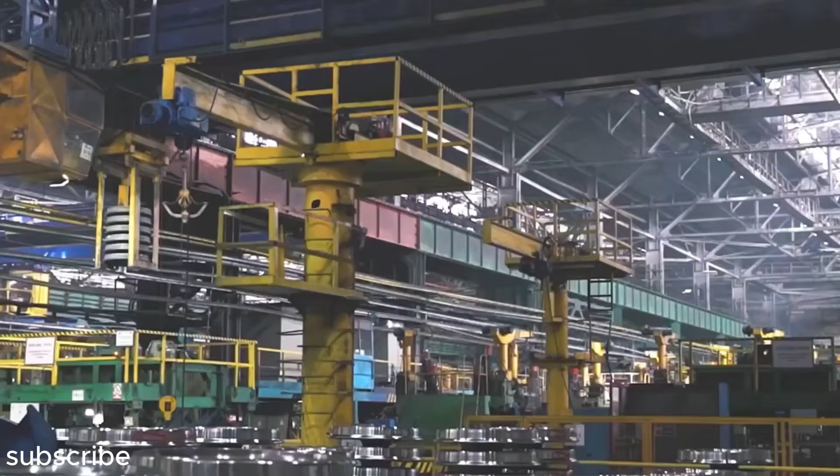Some machines carry the weight of their creation long after the men who built them are gone. They run through history, trailing the ambitions and the obsessions of those who designed them, moving through time with a kind of mechanical indifference to the human cost of their existence.

But there are rarer machines so entangled with the fate of their creators that the two stories become impossible to separate. Machines where the line between triumph and tragedy runs directly through the same moment, the same decision, the same single point where genius and catastrophe met and became permanently inseparable.

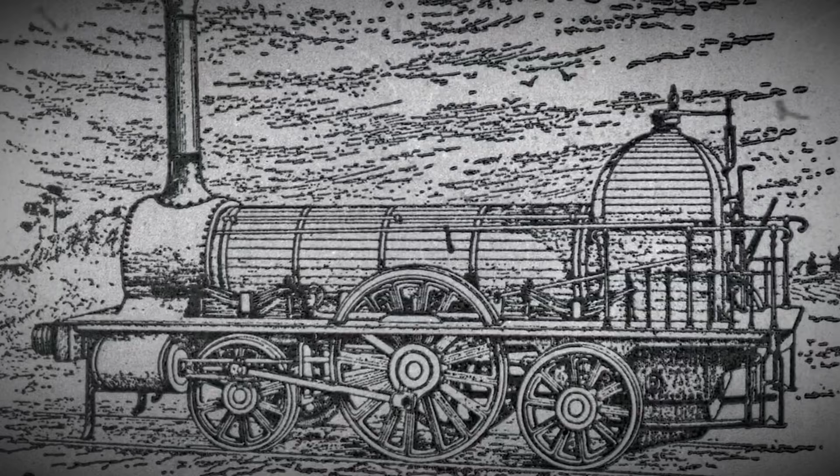This is the story of one of those machines, a locomotive that its inventor gave everything to build, that repaid that devotion in the worst possible way, and that afterward vanished so completely from history that for decades most people doubted it had ever existed at all.

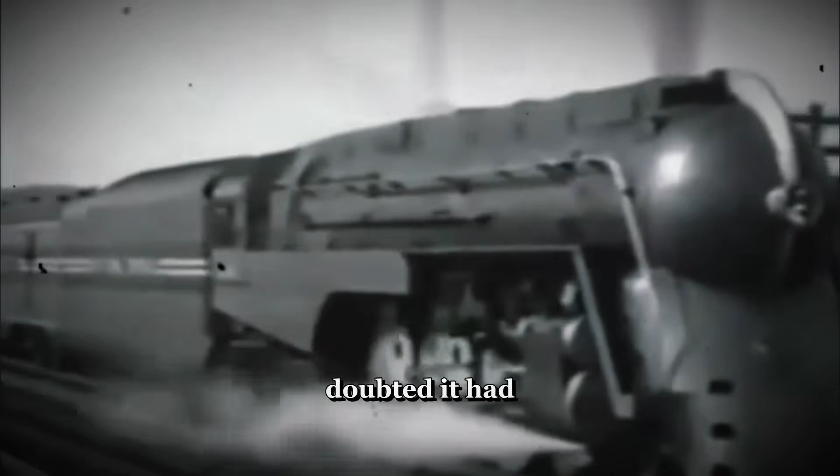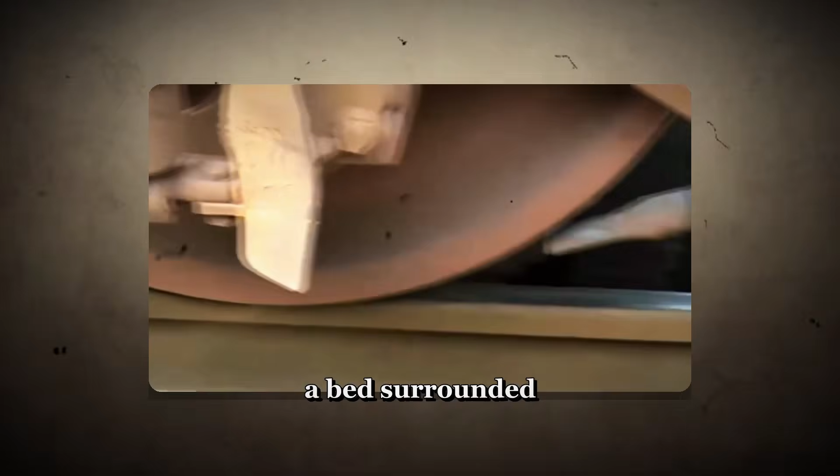The story begins not in a workshop or a railway yard, but in a hospital ward in the industrial city of Manchester in the winter of 1901. A man named Arthur Coleridge Drummond lay in a bed surrounded by the kind of institutional stillness that settles over places where people go to recover from things that can't be recovered from.

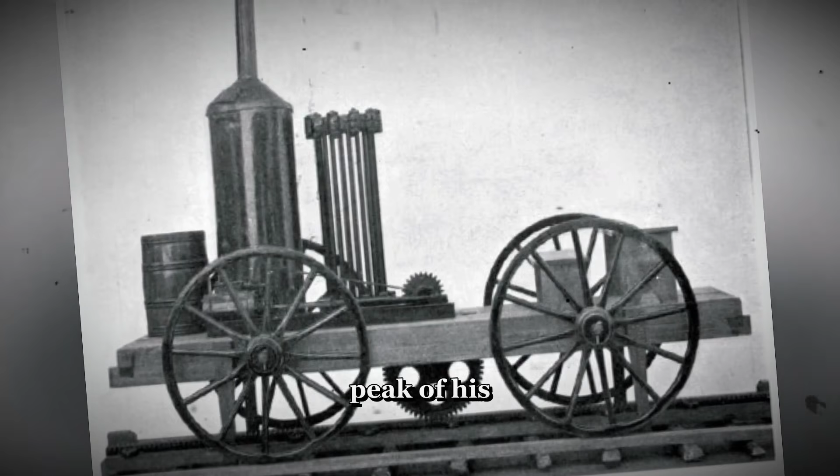He was 43 years old, which, in the context of Victorian and Edwardian engineering, meant he was at the absolute peak of his professional life. The best work, by conventional measures, should have been ahead of him. Instead, he was lying in a hospital bed with injuries that would keep him there for 8 months.

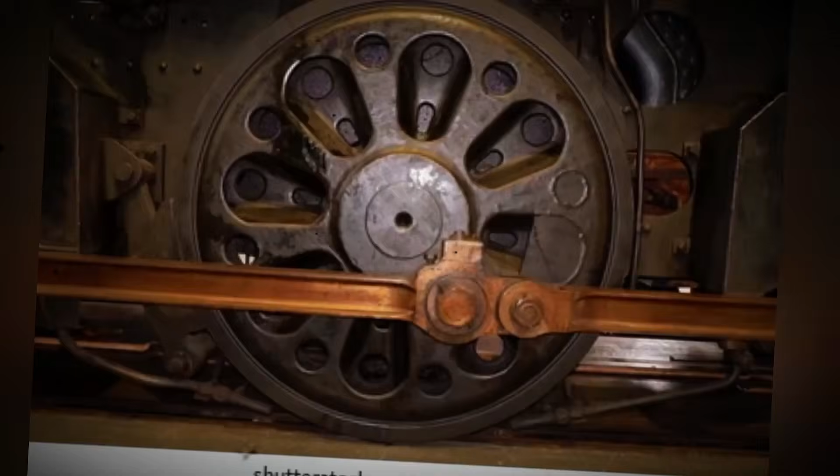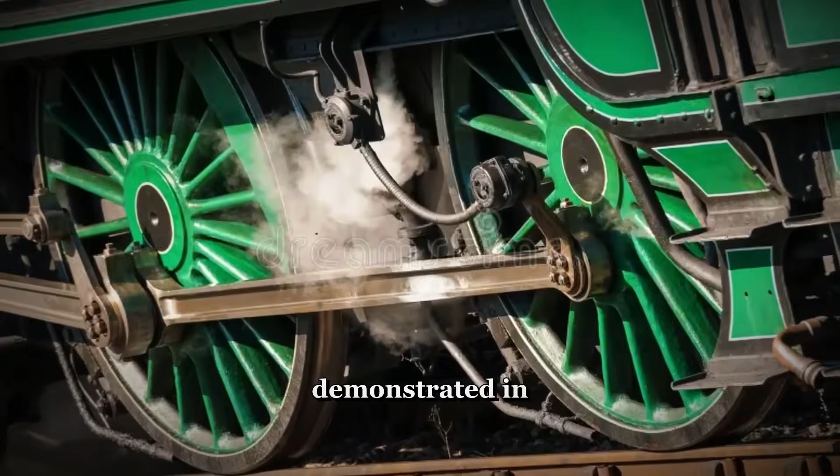Injuries sustained not in some industrial accident or railway disaster, but in the testing of a machine that he himself had designed, that he had spent 11 years of his life building, and that had, on its first full-speed trial, demonstrated in the most brutal possible way that it was not yet ready for the world.

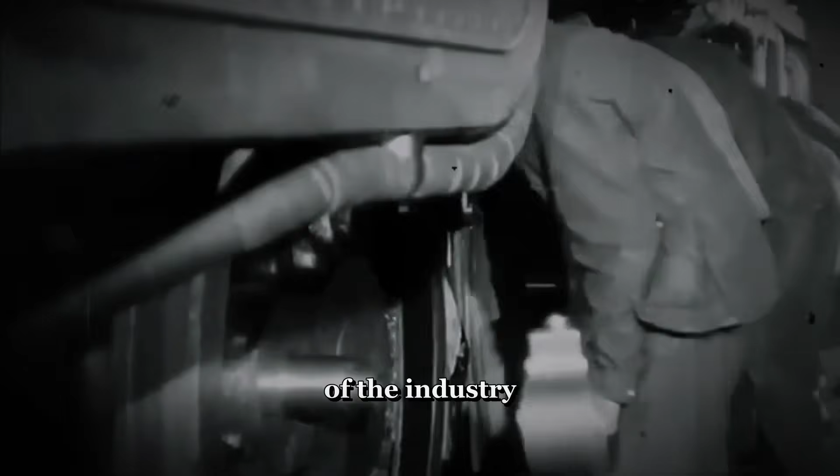Drummond was not a well-known figure in the railway world. He had spent his career at the margins of the industry, working as a consultant rather than as the chief engineer of any major company, taking contracts where he could find them, surviving on the income generated by smaller projects while devoting his real attention and his own financial resources to the machine that consumed him.

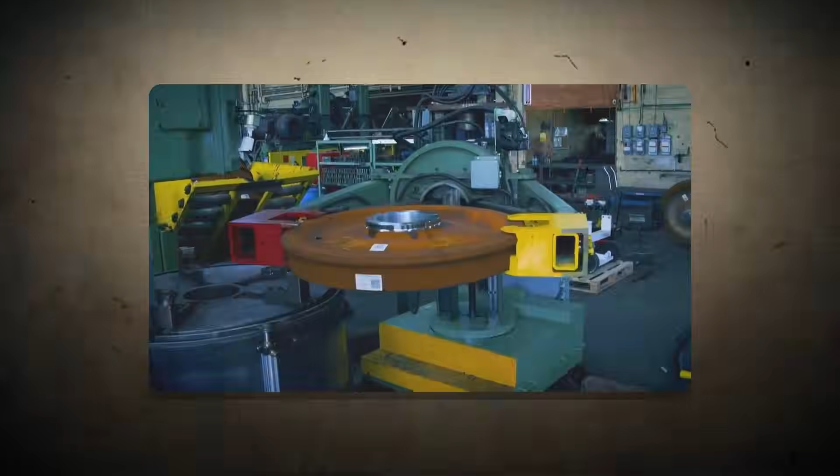That machine was a locomotive that he called, with the kind of quiet confidence that sometimes borders on arrogance, the perfect engine. The name was not accidental. Drummond genuinely believed that the history of locomotive design had been a long progression of approximations, each generation of engineers getting closer to an ideal that nobody had yet achieved.

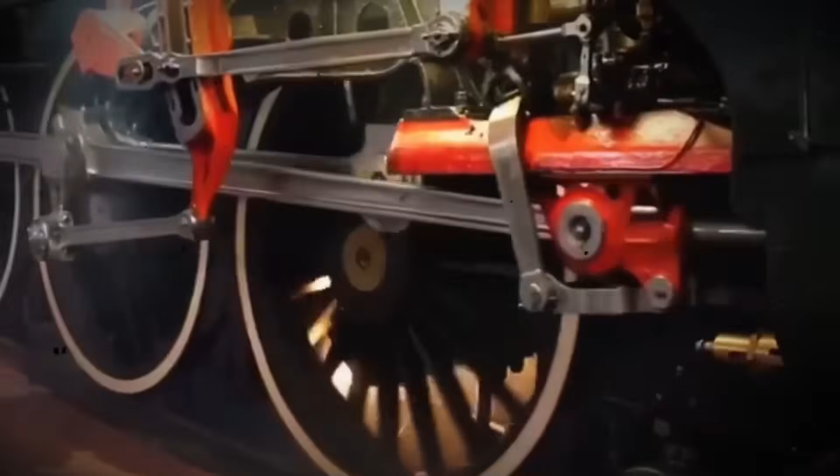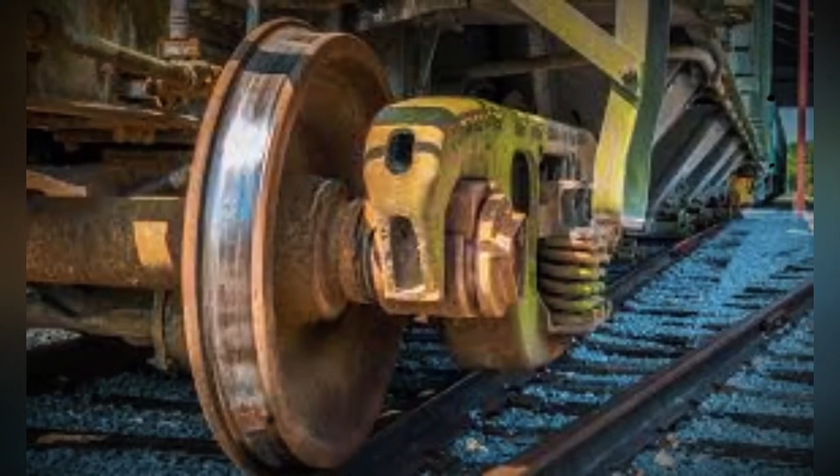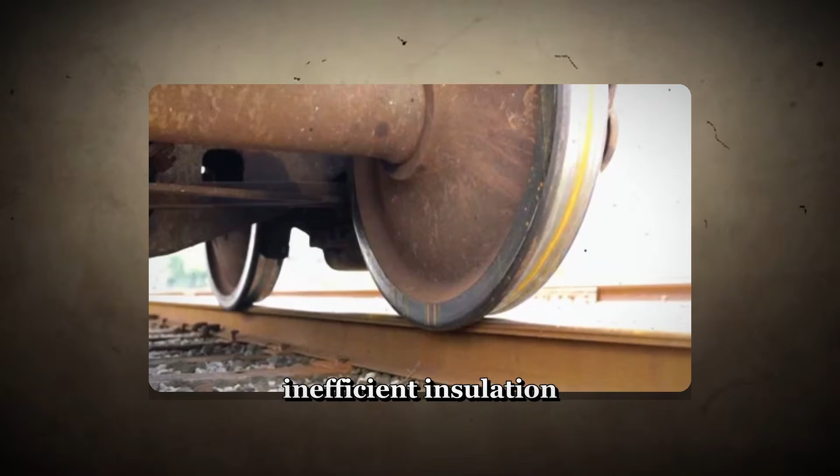The ideal he had in mind was specific and technical. He wanted a locomotive that wasted nothing, a machine where every unit of heat generated by the combustion of fuel was converted through a sequence of mechanical processes that he had spent years calculating and refining into tractive effort at the wheel. No steam exhausted before its full energy was extracted. No heat lost to the atmosphere through leakage or inefficient insulation. No mechanical energy absorbed by friction in systems that weren't contributing directly to forward motion.

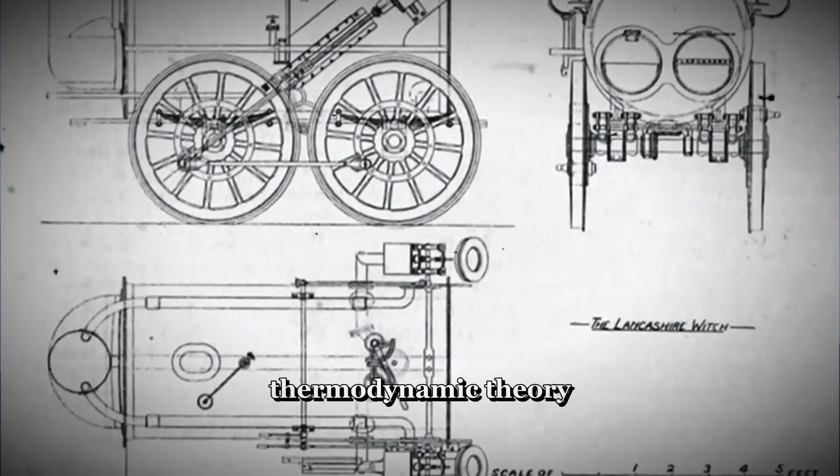This was not an impossible dream in theoretical terms. Thermodynamically, the ideal engine Drummond envisioned was coherent. The problem was engineering it into a machine that could actually run on railways. The gap between thermodynamic theory and mechanical reality was precisely the gap that had defeated every previous attempt to build a truly efficient steam locomotive.

Drummond was convinced that his predecessors had failed not because the goal was unachievable, but because they hadn't been willing to depart radically enough from conventional design approaches. He was willing to depart radically. He was, if anything, too willing.

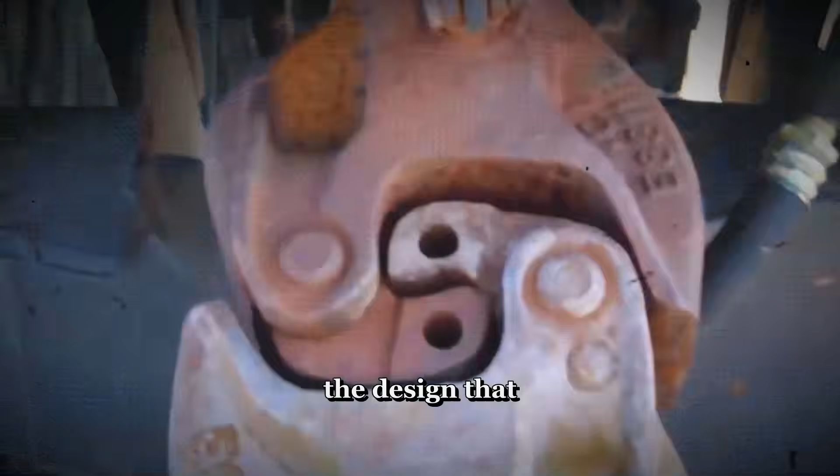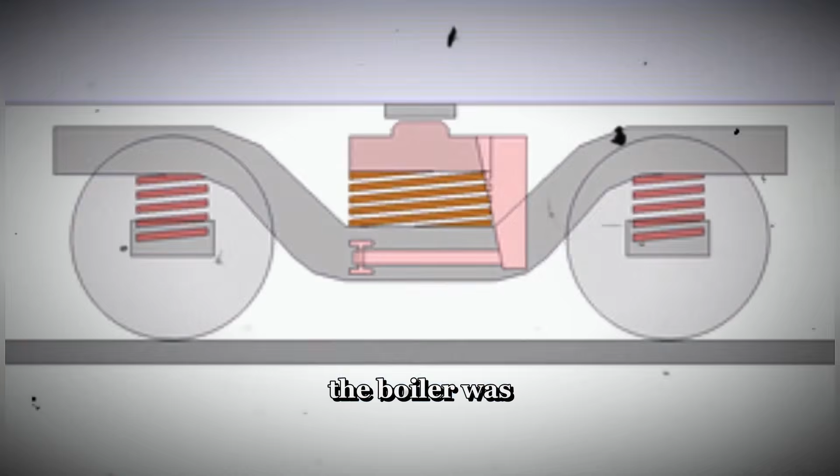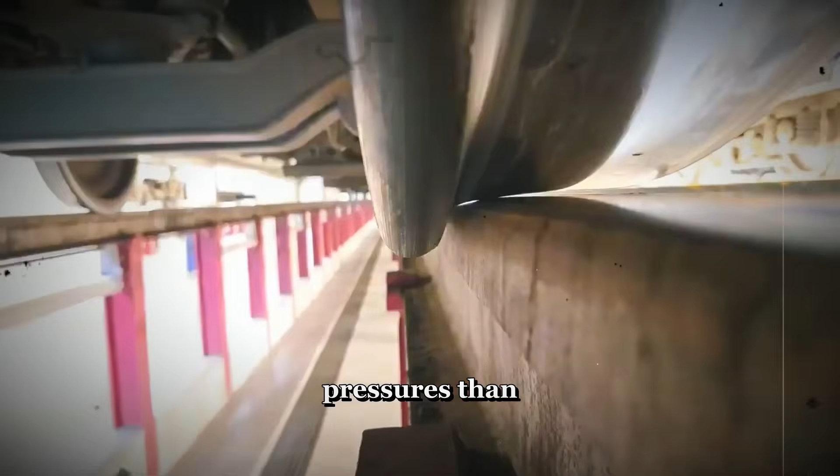The design that Drummond developed over 11 years of calculations, drawings, revisions, and more revisions was unlike anything that had appeared in British locomotive history. The boiler was a compound water tube design, borrowing principles from marine engineering that had never been applied to a railway locomotive. Instead of the conventional arrangement of fire tubes passing through water, Drummond's boiler used water tubes passing through the hot gas stream, a configuration that allowed much higher operating pressures than conventional designs could safely achieve.

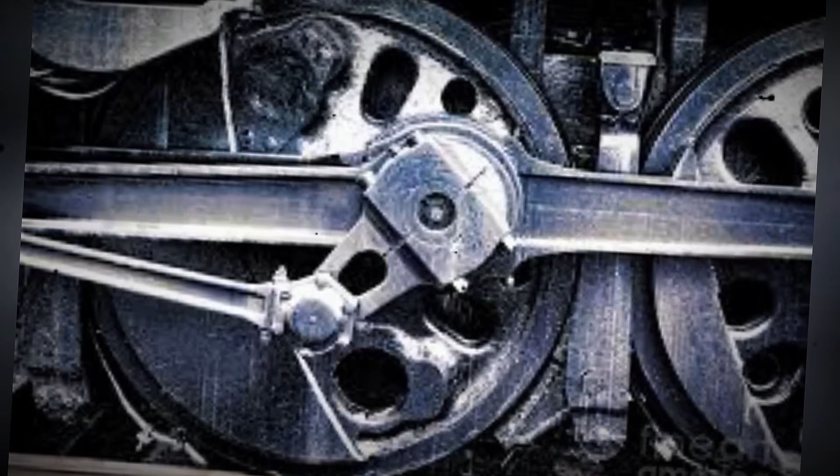The working pressure was specified at 400 pounds per square inch, nearly double the standard for express passenger engines of the era. The steam circuit was correspondingly complex.

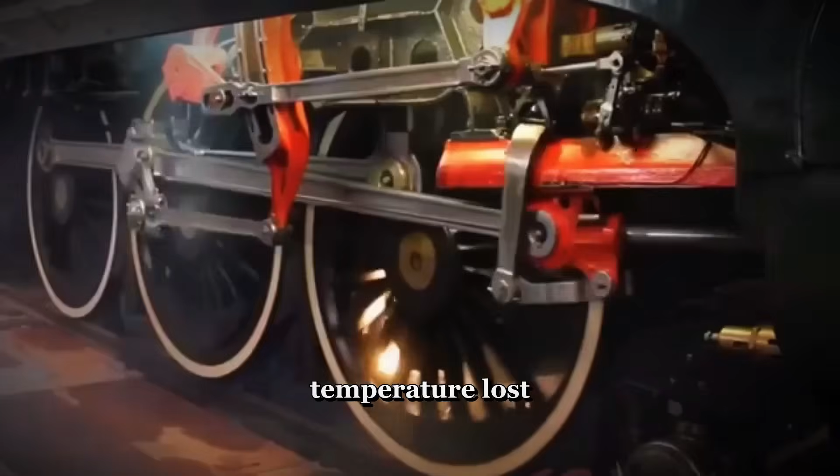Steam generated in the high-pressure boiler passed first through a high-pressure cylinder where it did the majority of its work. It was then collected, reheated to restore the temperature lost during expansion, and passed through an intermediate cylinder. From there it was collected again, reheated once more, and passed through a large low-pressure cylinder where the remaining energy was extracted before the steam was finally condensed and returned as water to the boiler.

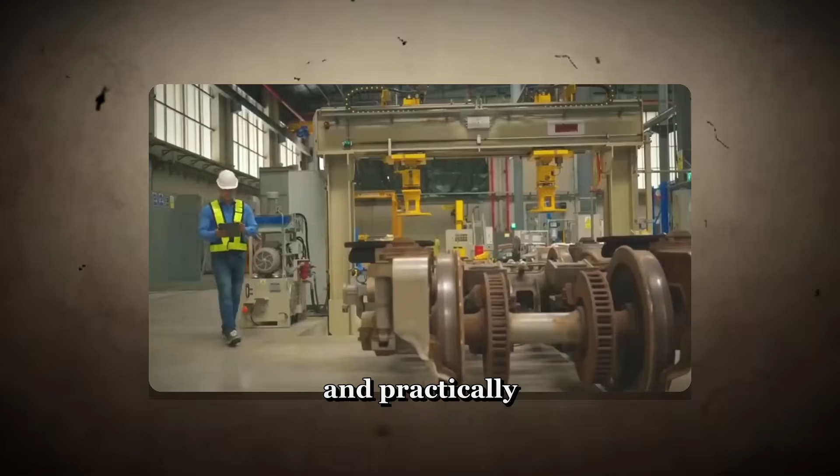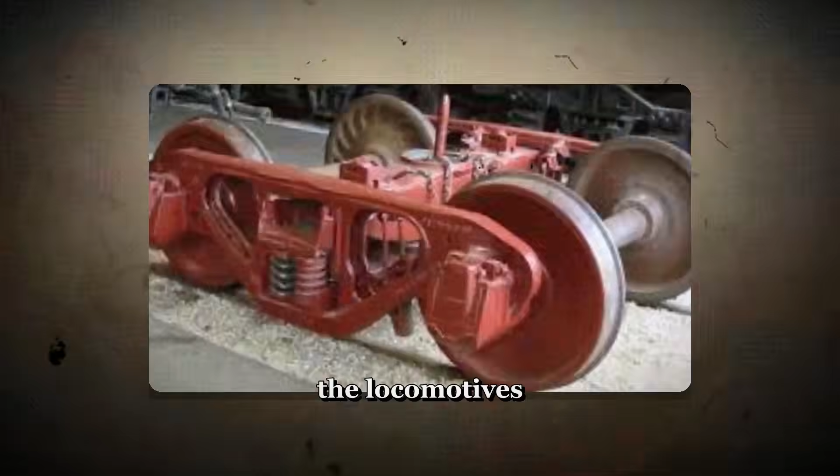This triple expansion arrangement with intermediate reheating was theoretically elegant and practically nightmarish. The number of pipes, valves, heat exchangers, and control mechanisms required to make it function was extraordinary. The locomotive's internal systems were more complex than anything previously attempted in railway engineering anywhere in the world.

Drummond financed the construction partly through his own savings, partly through loans, and partly through contributions from a small group of investors who believed in his vision with an intensity that, in retrospect, looks more like faith than engineering judgment. The construction took place at a small workshop in Sheffield, where a workforce of 7 skilled craftsmen worked under Drummond's direct supervision for 3 years.

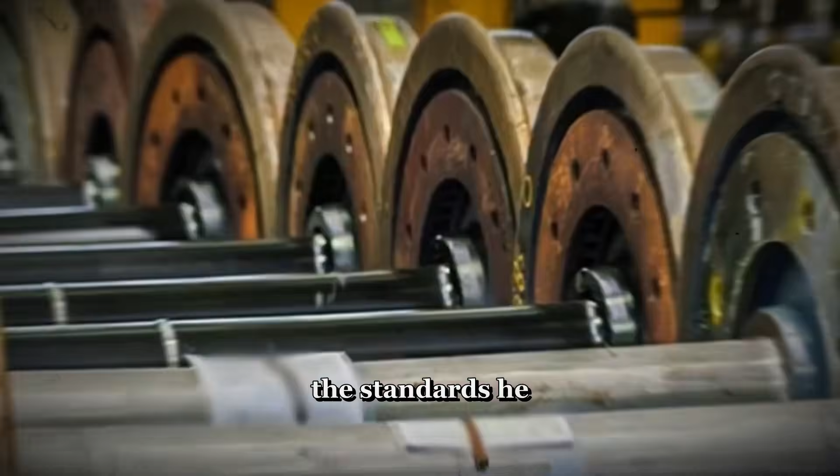The standards he demanded were extraordinary. Components were machined to tolerances that the workshop's equipment could barely achieve. Assembly procedures were documented with a precision that was decades ahead of common practice.

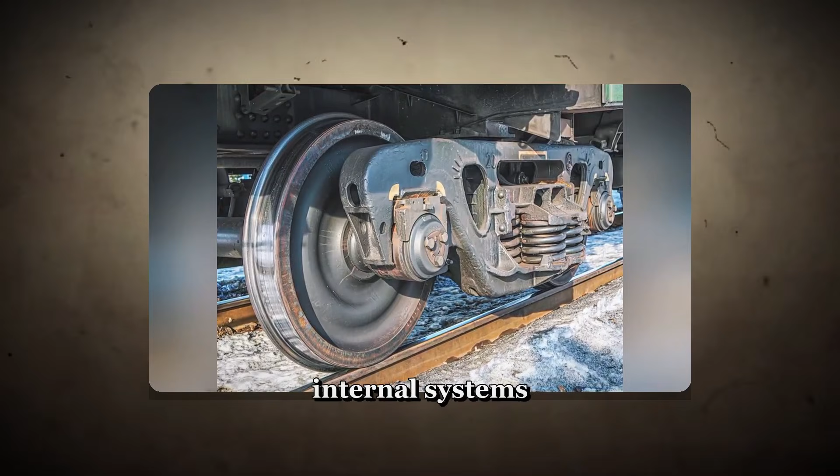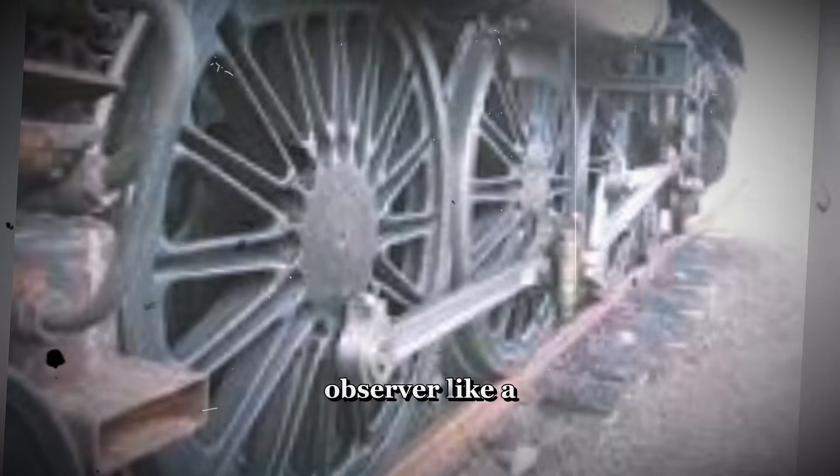By the autumn of 1900, the locomotive was complete. It sat in the Sheffield workshop gleaming with fresh paint and polish, its complex internal systems invisible behind a conventional exterior that gave no hint of the mechanical revolution Drummond believed it represented. It looked, to the casual observer, like a reasonably conventional express locomotive of its era. Only the density of pipework visible at certain angles suggested something unusual was happening inside its carefully crafted skin.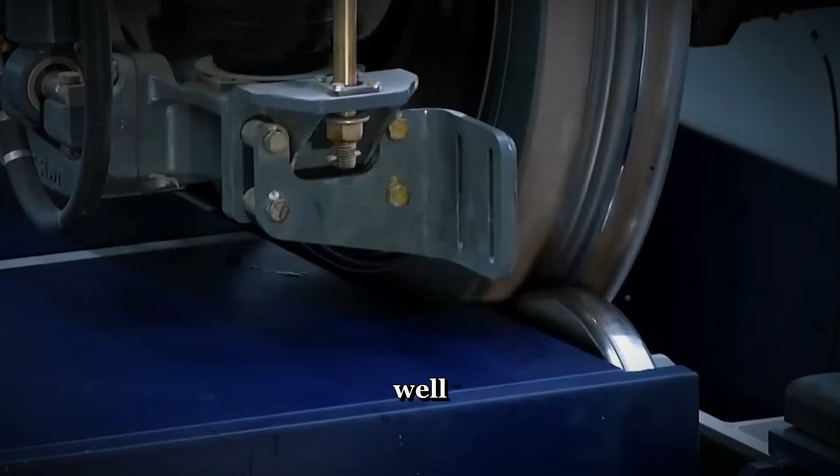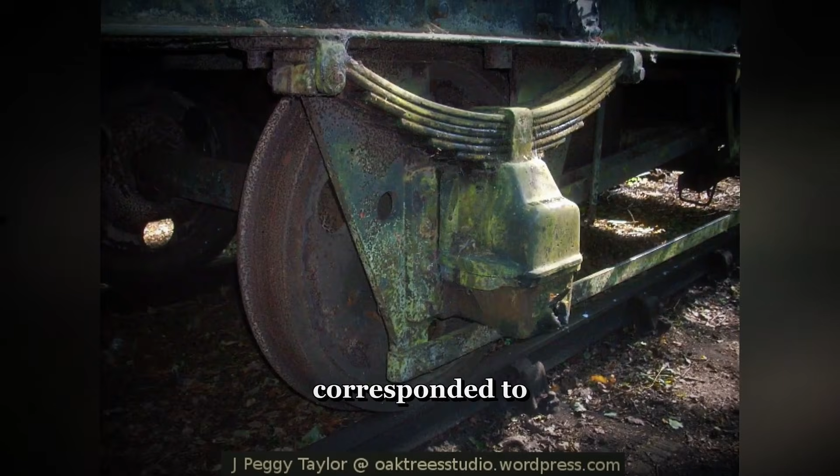The initial tests were conducted at low speed on a short stretch of private track near the workshop. These tests went well, encouragingly well. The locomotive moved under its own power. The complex steam circuit functioned as designed. The pressures and temperatures at various points in the system corresponded to Drummond's theoretical predictions with a closeness that made him dizzy with satisfaction. The years of calculation, the months of construction, the financial strain, and the professional isolation all seemed, in those initial moments of successful operation, to have been entirely justified.

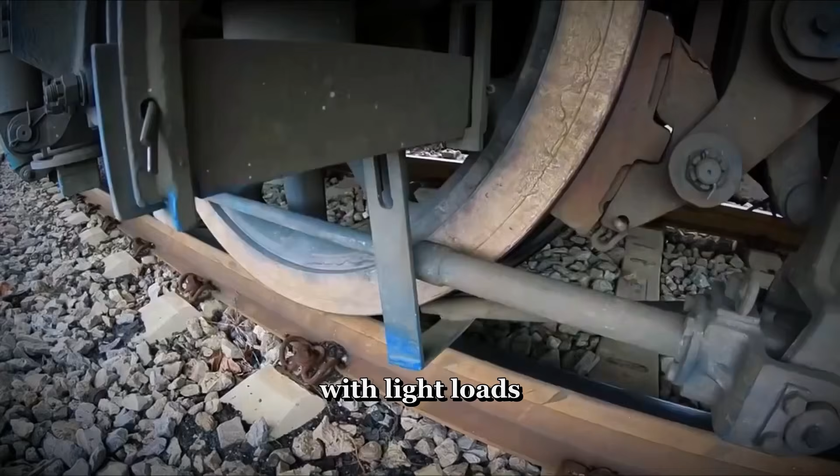The problem was that low-speed tests on private track could not reveal the locomotive's behavior under the conditions for which it had been designed. The perfect engine, as Drummond's complex reheating system made clear, needed to be running hard to demonstrate its advantages. At low speeds, with light loads and moderate steam demands, the sophisticated triple expansion circuit was largely irrelevant. Its benefits would only appear when the locomotive was operating at full output, when the pressure differences between the stages were large and the heat recovery systems were working at full capacity.

To properly evaluate the design, a full-speed trial was essential. Drummond arranged this trial with characteristic thoroughness. He secured permission to use a section of the Great Central Railway for a high-speed run. He selected a stretch of relatively flat track where the locomotive could be brought up to maximum speed without the complication of gradients. He assembled a party of observers, including 2 engineers whose opinions he respected and whose testimony he intended to use when presenting the perfect engine to railway company executives who might be interested in licensing the design. He prepared measuring instruments to record pressures, temperatures, and fuel consumption throughout the run.

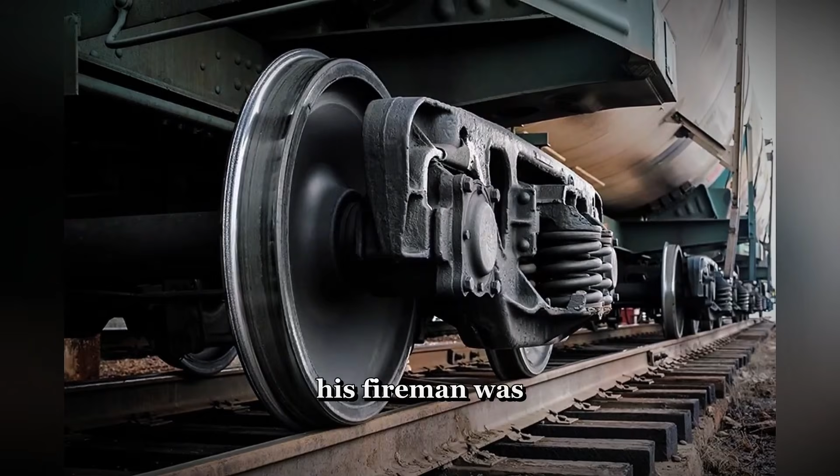On the morning of the trial, the atmosphere was tense with anticipation. Drummond drove the locomotive himself, something unusual but not unprecedented for an inventor demonstrating his creation. His fireman was a young man named George Parkin, chosen for his skill and calmness under pressure. The observers rode in a special coach attached behind the locomotive. Everything was in order. Everything was as prepared as it possibly could be.

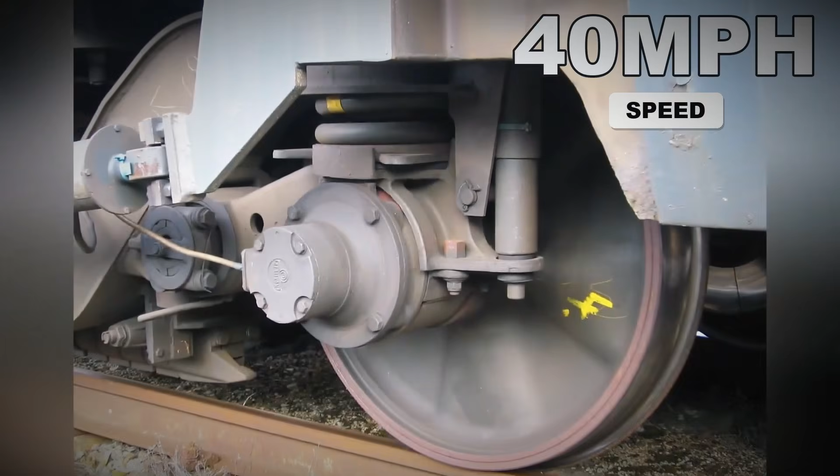The run began well. The locomotive accelerated smoothly, the complex steam circuit working exactly as Drummond had designed it. Speed built gradually, passing 40 miles per hour, then 50, then 60. The observers in the coach behind were recording data, noting with growing interest that the fuel consumption figures being calculated were genuinely impressive, significantly better than contemporary express locomotives of equivalent power output. Drummond, on the footplate, was experiencing the extraordinary satisfaction of seeing years of theoretical work validated by physical reality.

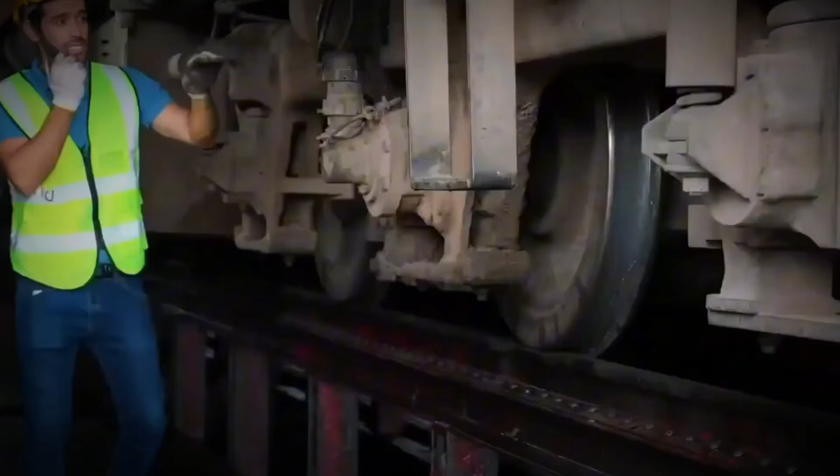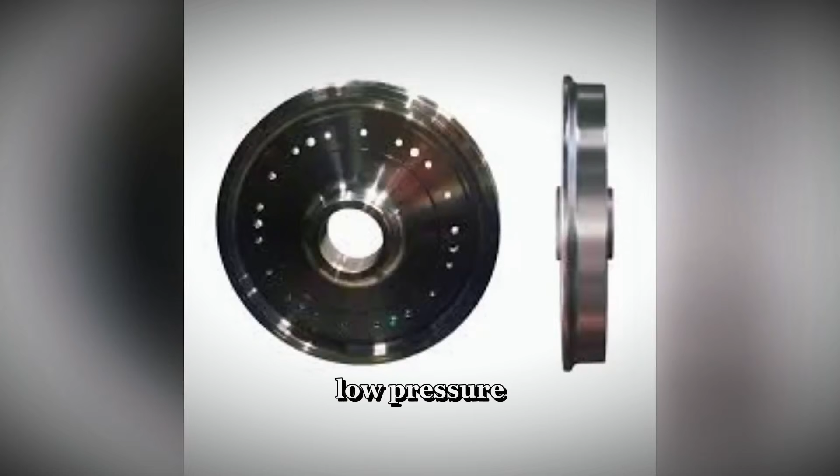Then, at approximately 70 miles per hour, something changed. The change was subtle at first, a slight variation in the sound of the exhaust that Drummond registered in the back of his mind without immediately understanding its significance. Then a pressure gauge on the complex manifold that connected the intermediate and low-pressure sections of the steam circuit began to show readings that diverged from the predicted values. Drummond reached for the regulator, intending to make a minor adjustment to the steam supply to the intermediate reheater.

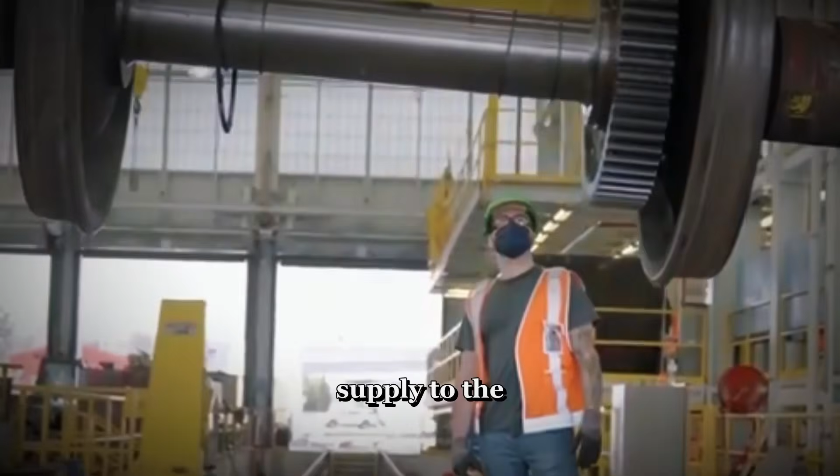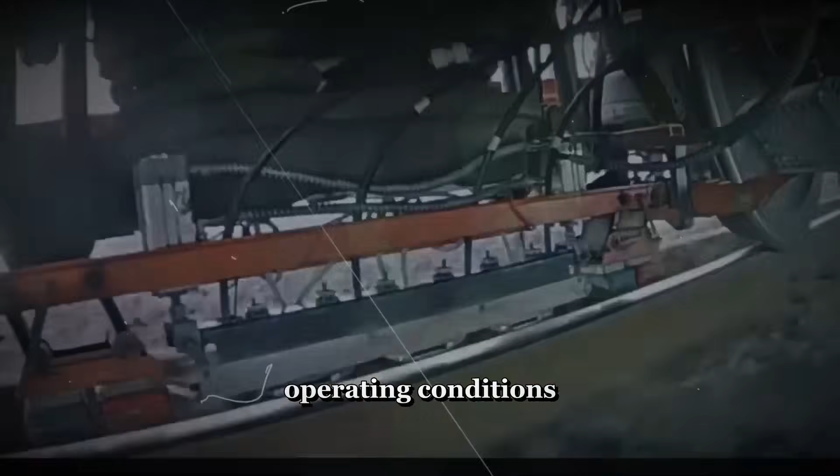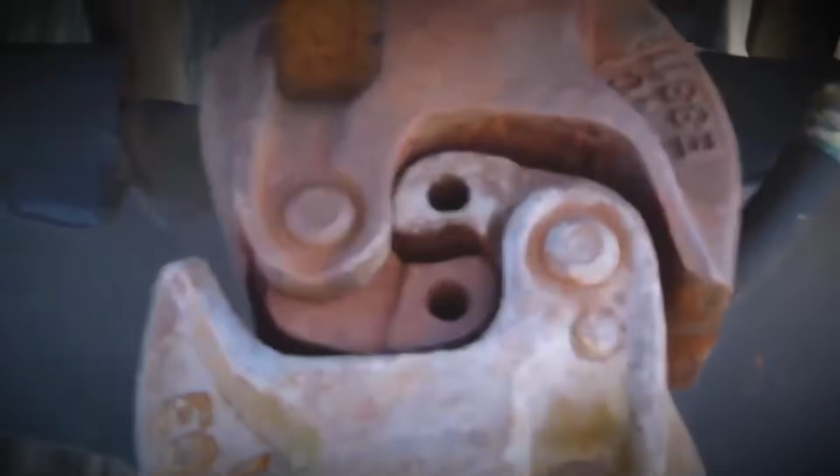What happened next happened very quickly. The adjustment Drummond made triggered a pressure transient in the intermediate steam circuit, a sudden spike that the system had not been designed to handle because the theoretical calculations had not fully accounted for certain dynamic effects that only manifested at high speed under real operating conditions. The pressure spike propagated through the circuit faster than Drummond could respond. A connection joint in the high-pressure steam piping, stressed by 11 years of occasional test operation, failed suddenly and completely. The steam release was explosive in its intensity.

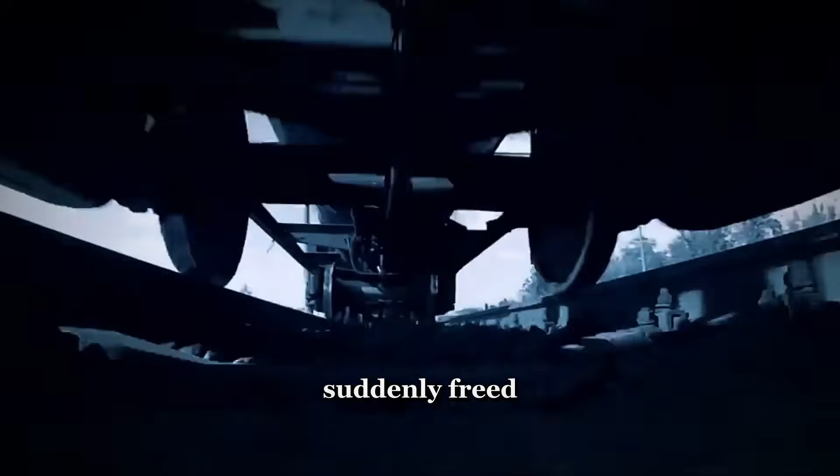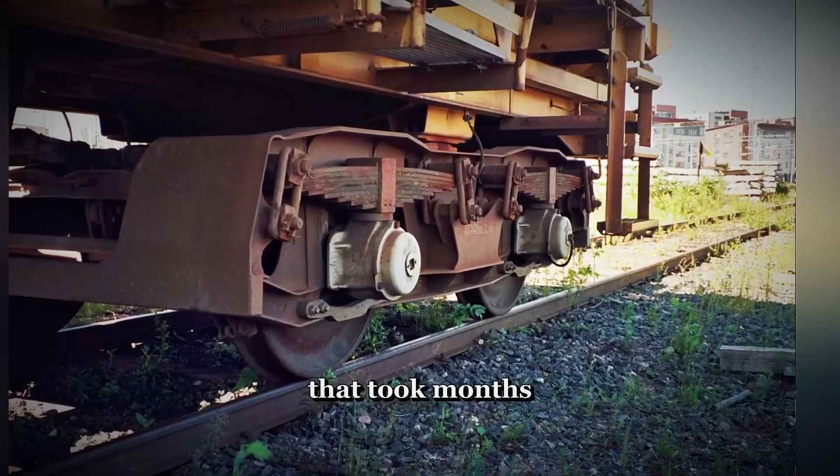At 400 pounds per square inch, steam contains energy that expresses itself with violence when suddenly freed. The cab of the locomotive was immediately engulfed in scalding vapor. George Parkin, the fireman, was thrown clear by the force of the release and sustained burns that took months to heal but did not threaten his life. Drummond was not so fortunate.

He was directly in the path of the high-pressure steam jet and sustained burns across much of his upper body, severe enough to require immediate hospitalization and leave permanent damage that would affect his health for the rest of his life. The locomotive itself survived the incident in better condition than its creator.

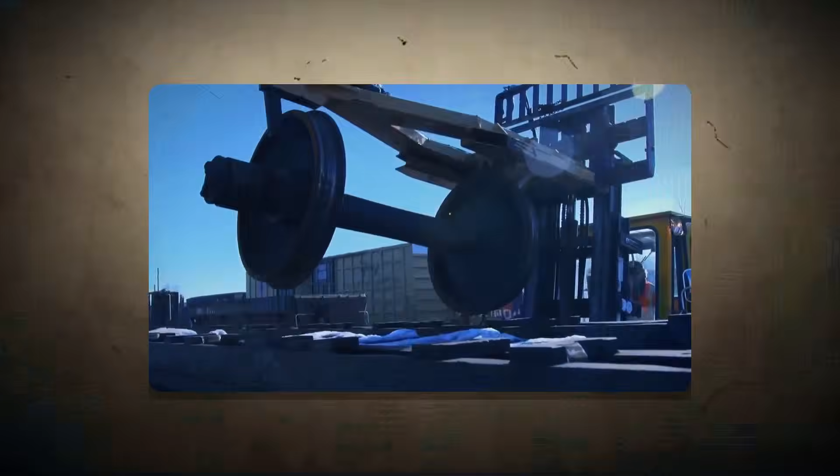The steam release had been dramatic, but the mechanical damage was limited. The failed joint could theoretically be repaired. The system could be inspected and modified, and the perfect engine could potentially run again. Whether it would be wise to run it again was a very different question, one Drummond was in no condition to consider from his hospital bed. During the 8 months of his recovery, the locomotive sat in a railway siding in Lincolnshire, where it had been moved after the incident.

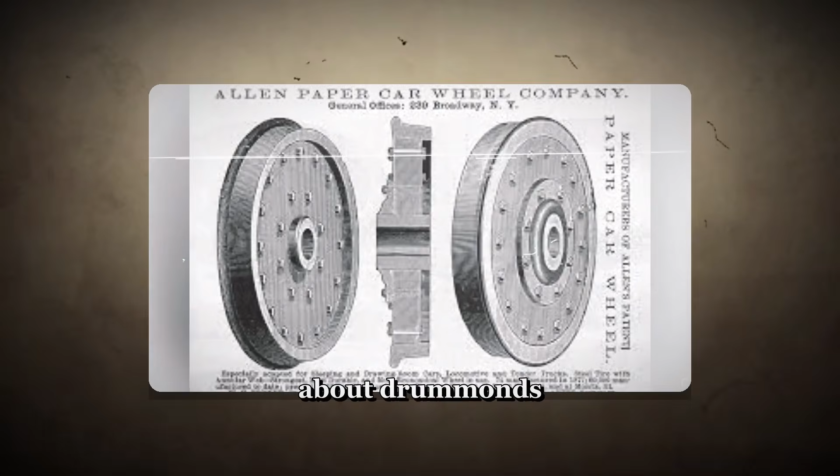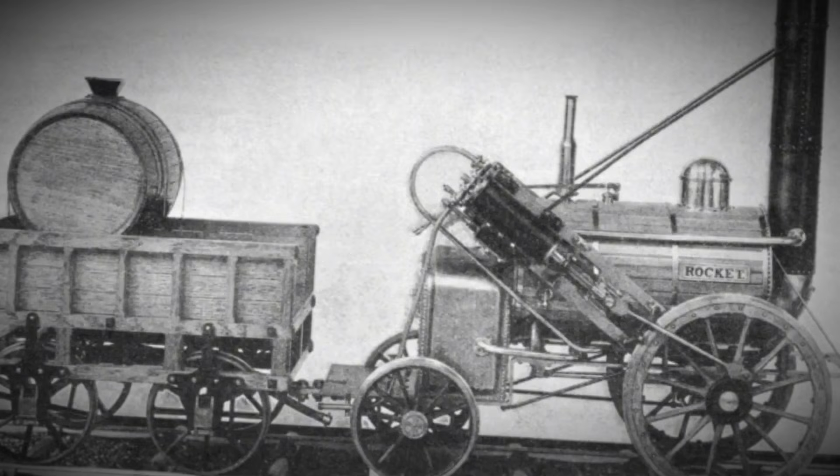Its future was uncertain. Drummond's investors, shaken by the accident, were reassessing their commitment. The railway companies that had been potential customers received news of the failed trial with reactions ranging from cautious concern to barely concealed satisfaction at the failure of an unconventional approach many had always regarded with skepticism. The engineering press, which had occasionally published speculative pieces about Drummond's project, now published pieces that were noticeably less speculative and more critical.

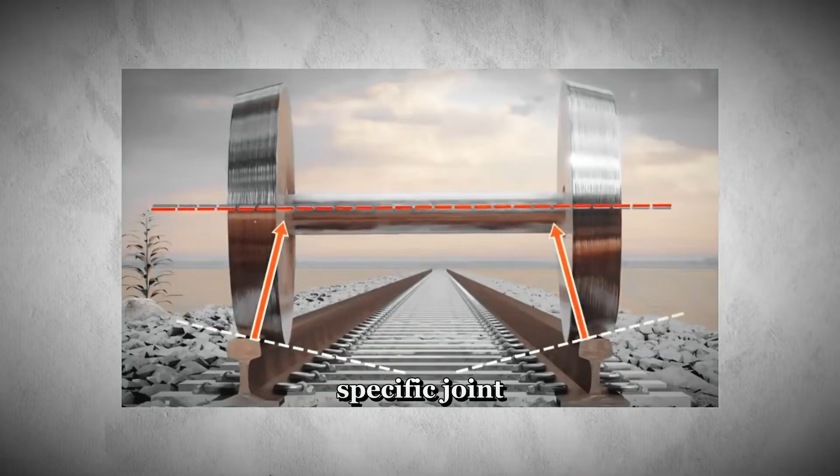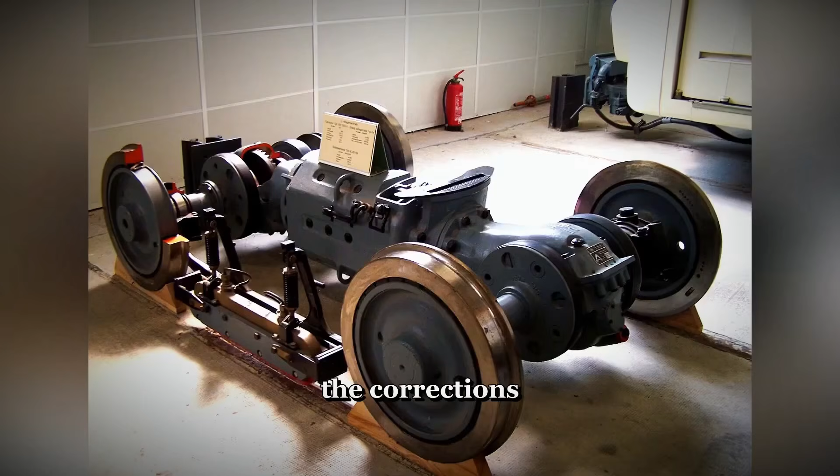Drummond emerged from hospital in the autumn of 1902, diminished in body but undiminished in conviction. He was still certain the perfect engine represented a genuine advance. He attributed the accident not to any fundamental flaw in the design, but to a manufacturing deficiency in the specific joint that had failed, a deficiency that could be corrected, a lesson that could be incorporated into a revised design. He returned to Sheffield and began work on what he called the corrections, a program of modifications he believed would address every vulnerability the trial had exposed.

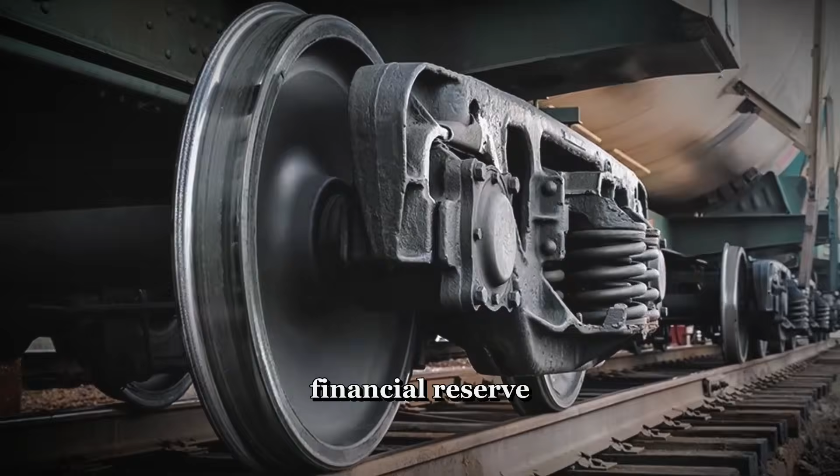The problem was money. The accident had consumed the confidence of his investors along with much of the remaining financial reserve. One by one they withdrew their support, each departure politely worded, each another blow to a project already financially precarious. Drummond sold his house. He moved into lodgings. He reduced his personal expenditure to the absolute minimum while continuing to pay the workshop staff implementing his modifications. The determination was absolute, and the resources were disappearing.

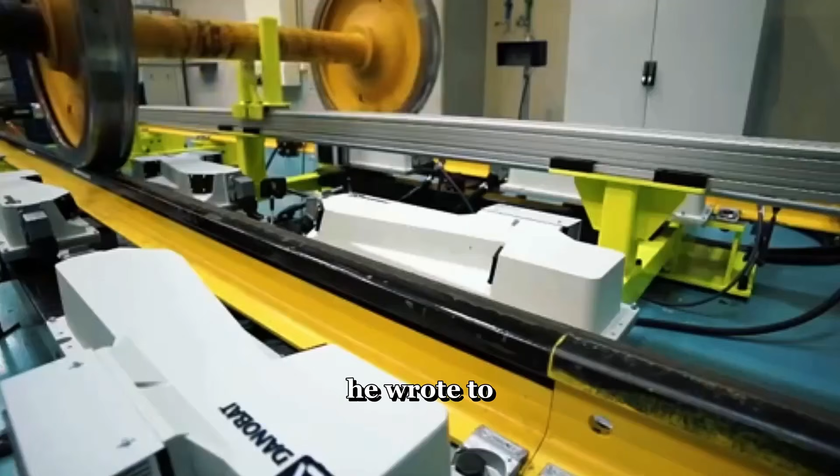By 1905, with the modifications nearly complete but the financial situation critical, Drummond made a decision he believed represented his last real chance to save the project. He wrote to every major British railway company requesting an opportunity to demonstrate the locomotive. He wrote to the Board of Trade. He wrote to engineering institutions. He wrote to wealthy industrialists whose names appeared in the financial press. He received polite rejections, non-committal responses, and silence in roughly equal proportions.

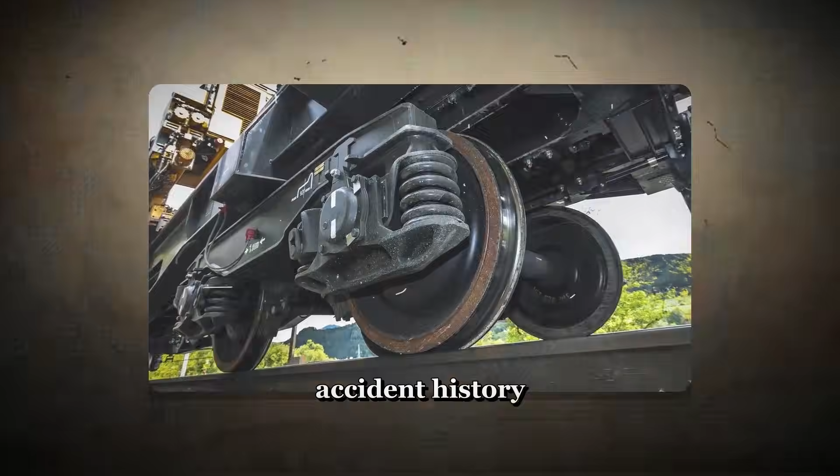The one positive response came from an unexpected direction. A consortium of South American railway investors, seeking modern technology for a new Highland Railway they were planning in Colombia, expressed genuine interest. They were not deterred by the accident history, perhaps because they were less familiar with it, or because their own project was ambitious enough that they were attracted to rather than repelled by unconventional approaches. Negotiations began in late 1905 and continued for nearly a year.

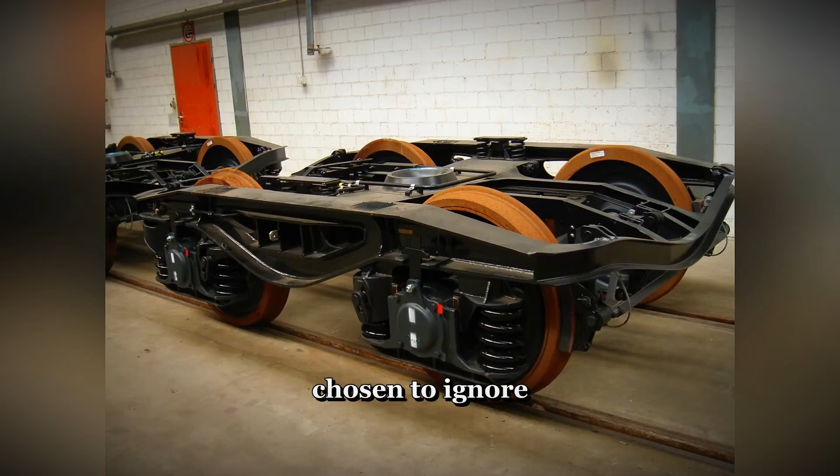In the end, the negotiations failed, not because the South Americans lost interest, but because Drummond's health collapsed before a final agreement could be reached. The injuries from the 1901 accident had left a legacy his doctors had warned him about, but that he had chosen to ignore in favor of continuing his work. In the winter of 1906, he was hospitalized again, and this time the prognosis was severe.

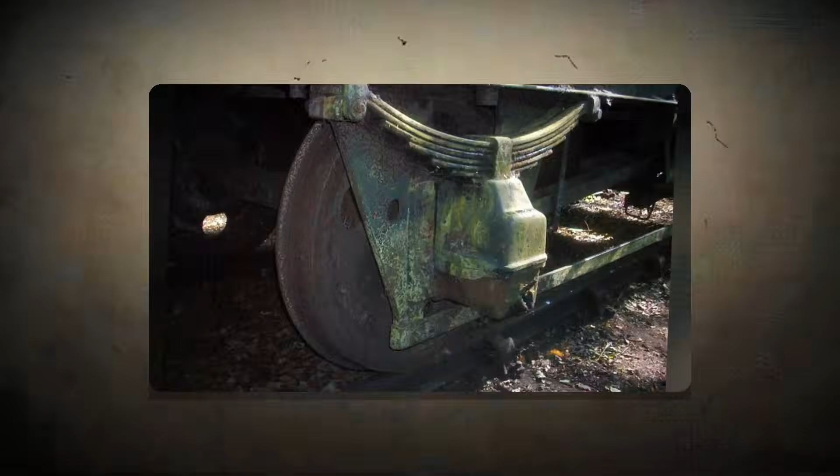He died in March of 1907 at the age of 49, with the perfect engine undemonstrated, the modifications complete but untested, and the financial situation of the project catastrophically unsustainable. The aftermath was swift and depressing. The workshop was closed. The staff dispersed to other employment. The investors, such as they remained, moved to liquidate whatever assets could be recovered from the project.

The locomotive itself was sold for a sum representing a painful fraction of what it had cost to build, to a small railway contractor who intended to use it for light freight work on a private industrial line in the north of England. For approximately 4 years, it served in this role, running in conditions very different from anything Drummond had intended, operated by crews who had no knowledge of its history or sophisticated internal systems, and who maintained it according to generic steam locomotive practices entirely inadequate for a machine of its complexity.

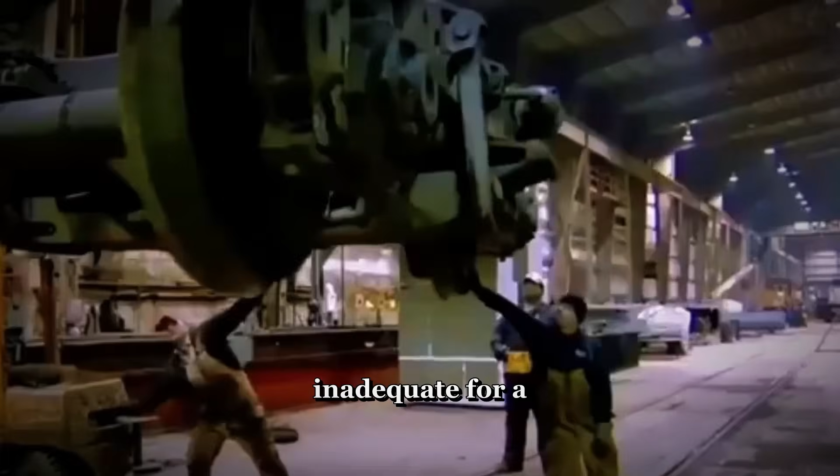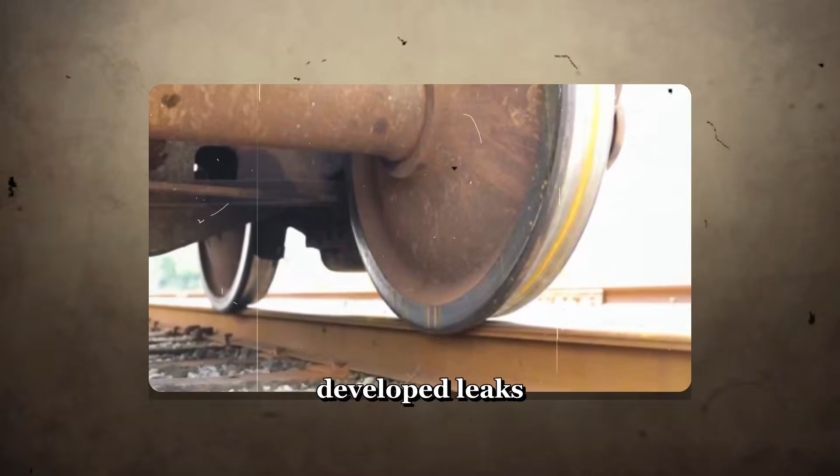The triple expansion circuit gradually fell out of proper operation as components wore without appropriate attention. The high-pressure boiler, maintained at lower pressures than its design intended, developed leaks that were addressed with patches rather than proper repair. Slowly, systematically, through neglect rather than any dramatic failure, the perfect engine ceased to be perfect.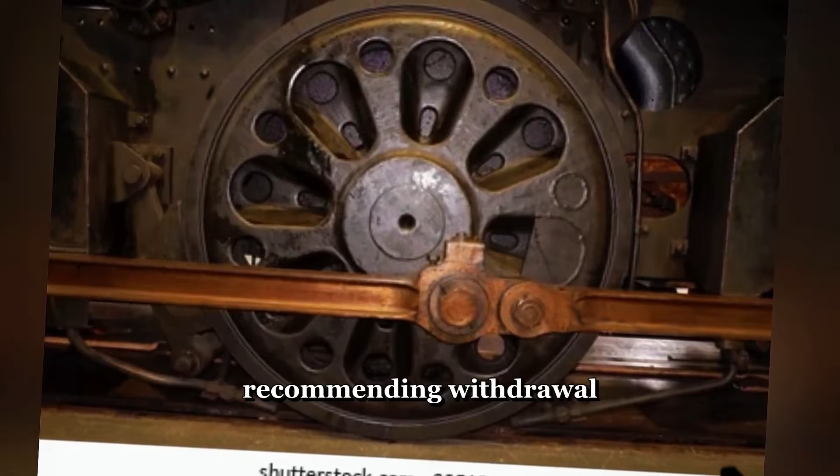Its final documented appearance in any railway record was in 1911, when a maintenance ledger from the industrial railway that had purchased it recorded an inspection finding that described the locomotive as uneconomical to repair and recommending withdrawal from service. After that entry, nothing. The trail goes cold with the completeness that only pre-bureaucratic record-keeping can produce. There are no scrapping records, no transfer documents, no subsequent mentions in any source that researchers have been able to identify. What happened to the perfect engine is genuinely unknown.

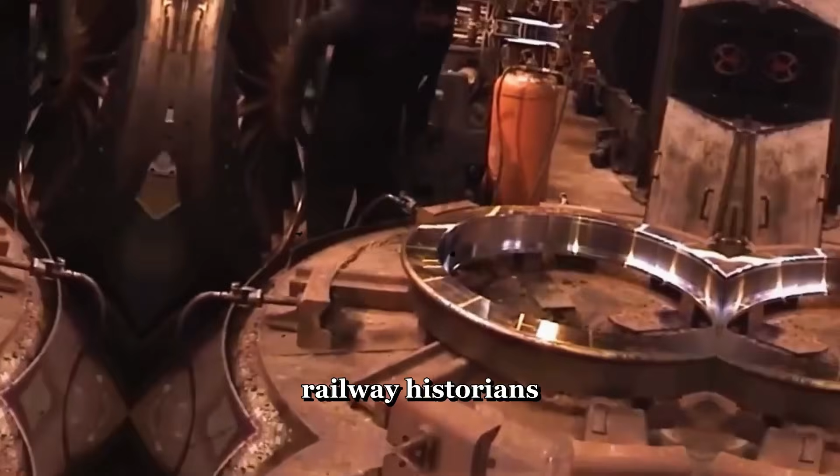The most probable explanation, supported by circumstantial evidence gathered by railway historians in the latter half of the 20th century, is that it was scrapped in approximately 1912 or 1913, its sophisticated components melted down and recycled without anyone present understanding what they were destroying. But this is inference rather than documented fact.

There are those who believe, or who want to believe, that the locomotive may have survived in some form, perhaps stored in an agricultural building, perhaps buried beneath decades of accumulated debris at the site of some long-closed industrial facility. These beliefs are almost certainly romantic rather than historically grounded, but they persist because the perfect engine was exactly the kind of machine that inspires the unwillingness to accept that it is simply gone.

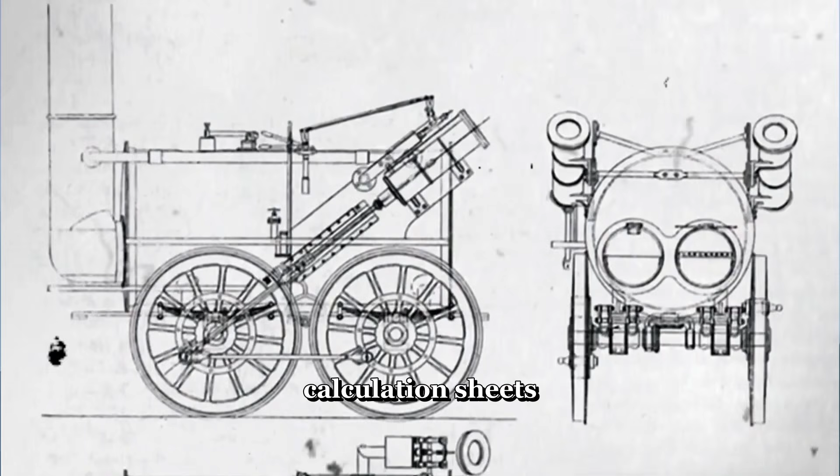The design work that Drummond produced, the engineering notebooks and calculation sheets that survived among the papers disposed of after his death and were eventually acquired by a technical library in Leeds, reveal a mind of genuine brilliance operating at the absolute frontier of what was technically conceivable in the early 20th century.

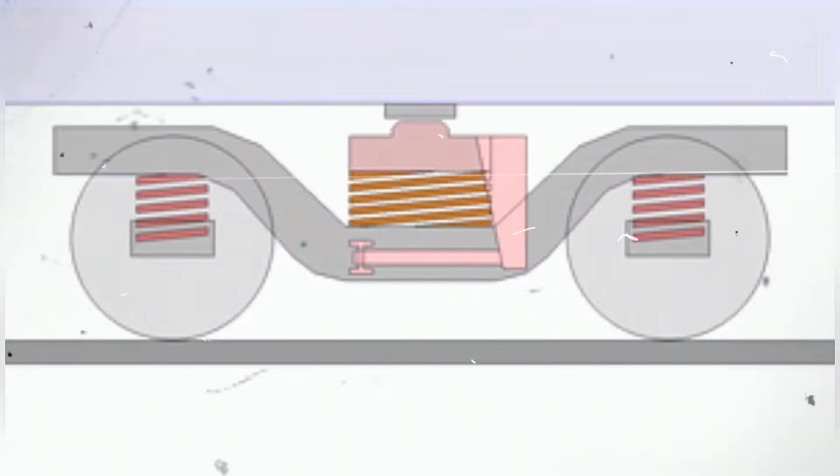Engineers who have studied those notebooks in the decades since their discovery have reached conclusions that carry a particular kind of sadness. The basic thermodynamic approach that Drummond pursued was sound. The principles he was applying were correct. The efficiency gains he was theorizing were real and potentially achievable.

Where he failed was not in the concept, but in the execution, specifically in the management of dynamic pressure transients in a high-pressure compound steam circuit, a problem that the mechanical engineering of his era lacked the theoretical tools to fully analyze and the manufacturing technology to fully solve.

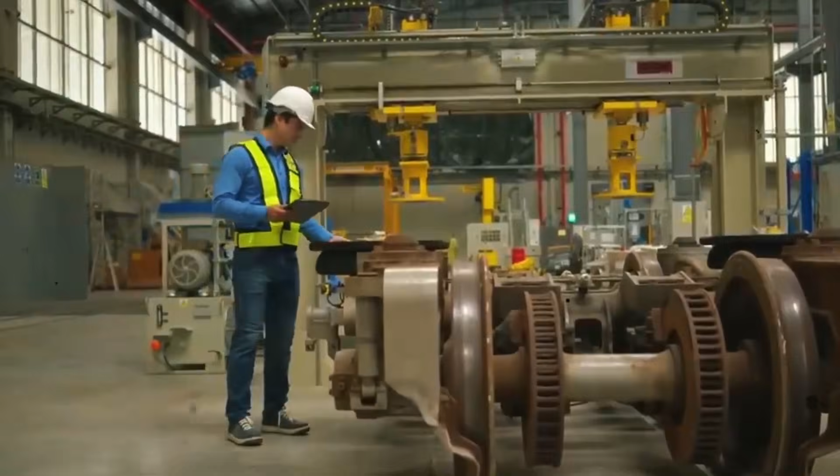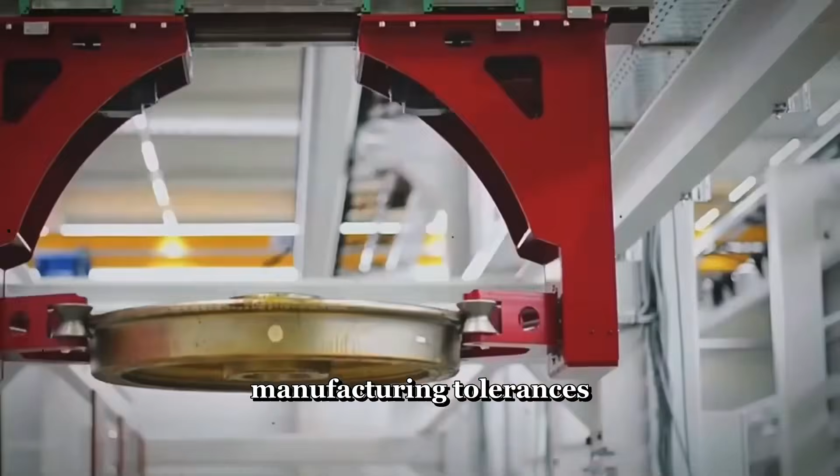In other words, Drummond was right, but he was right in a world that wasn't yet equipped to prove him right. The perfect engine needed materials that wouldn't exist for another generation, manufacturing tolerances that would require machine tools still decades from development, control systems that would only become possible with technologies Drummond couldn't have imagined.

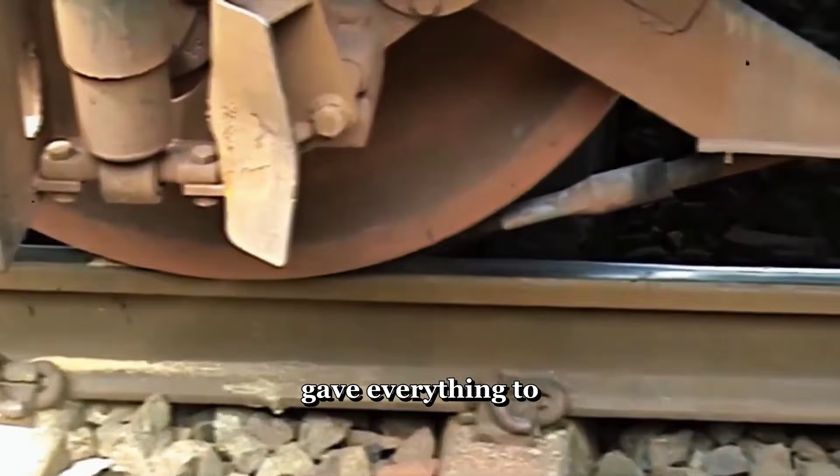He was, like so many inventors whose stories end in tragedy rather than triumph, precisely right at the wrong moment in history. The locomotive that killed its inventor and then disappeared has no memorial. There is no preserved example in any museum, no heritage railway that runs a restored version of the machine. There is only the Leeds notebook collection, those dense pages of calculations and sketches that represent the life's work of a man who gave everything to an idea and received in return a ruined body and an early death.

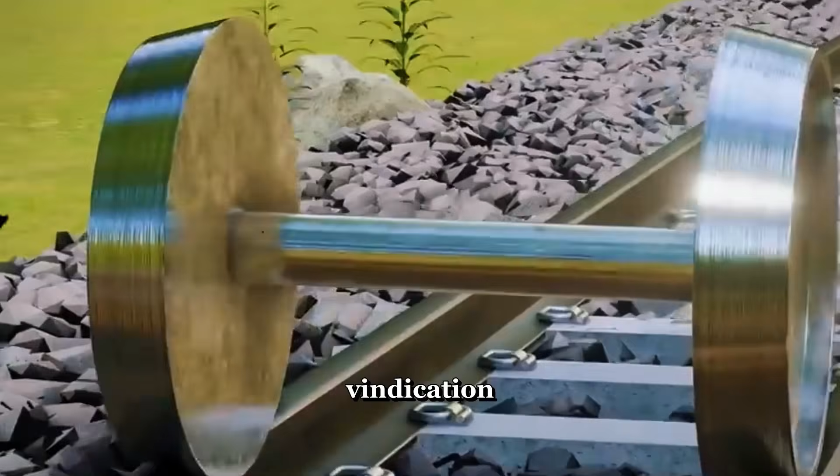Drummond's story is not unique in the history of technology. The annals of engineering are full of men and women who pursued correct ideas at the wrong moment, who paid personal prices that no professional achievement could justify, who disappeared into history while the ideas they championed eventually found their vindication in forms they would never recognize.

What makes Drummond's story distinctive is the particular intimacy of the connection between the inventor and the machine that failed him. The perfect engine didn't just fail as a technical demonstration. It physically destroyed the man who built it, burned away years of his life, and then outlasted him just long enough to fade into the kind of obscurity that feels, in retrospect, like a final insult.

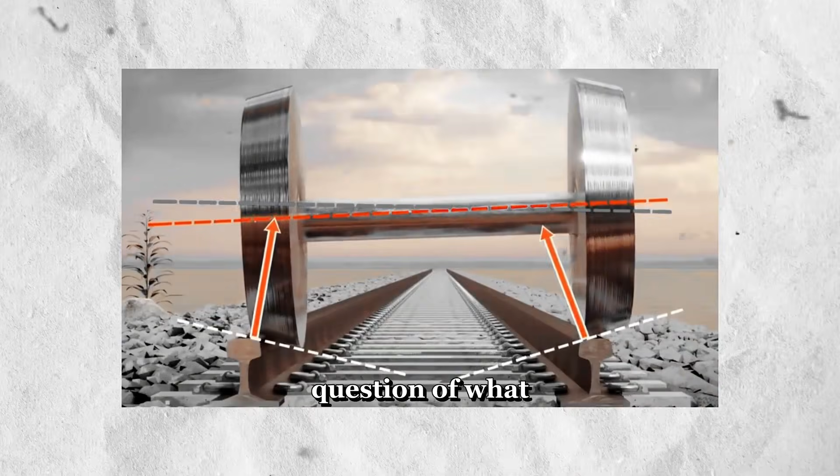Some machines carry the weight of their creation. Some machines carry the weight of their creator's destruction. The perfect engine did both, and then it vanished, leaving behind only those notebooks in Leeds, and the quiet, persistent question of what might have been if one connection joint had held, if one pressure spike had been absorbed rather than catastrophically released, if one morning's trial had gone differently on a stretch of flat track in Lincolnshire.

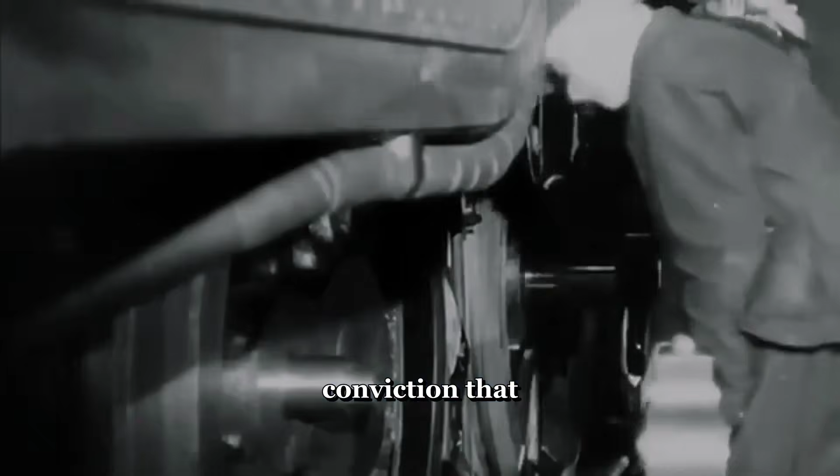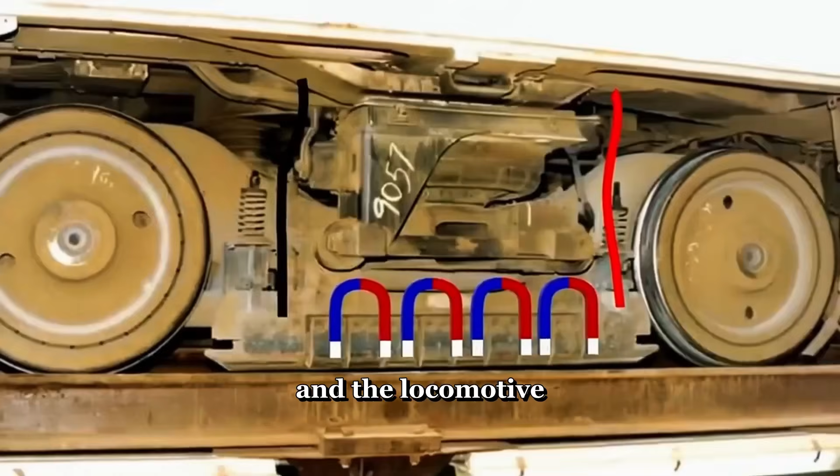It ran once, it nearly destroyed itself and its creator in the same moment. And then it disappeared, as completely as if it had never existed at all, leaving only the echo of what it might have meant if the world had been different, if the time had been right, if the perfect engine had found the perfect moment to prove that it truly was what its maker always insisted it was. Perfect.